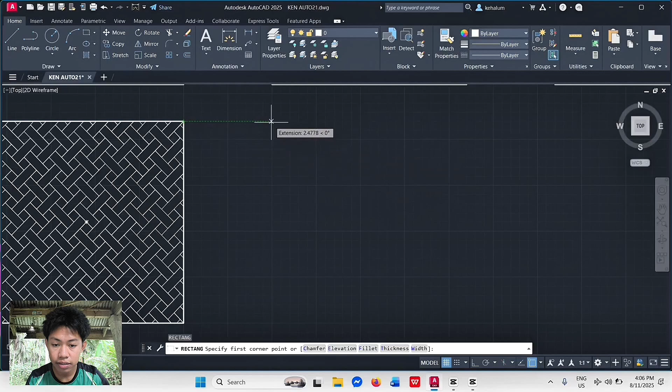Ngayon gagawin natin yung box number 5 and number 6. First, gagawa tayo ng rectangle. To create rectangle, we need to type the command REC, enter, and then specify corner point. So corner point niya is dito, pantay lang siya sa dito and then dito. On lang natin yung snap, from here to here. Ang size ng box natin is 5.5 by negative 5.5, then enter. Yan yung sukat ng ating box.

So copy lang natin to. Click lang natin, then type CO for copy, then enter. Then from here, copy lang natin dito. Yun, nakopy na natin siya.

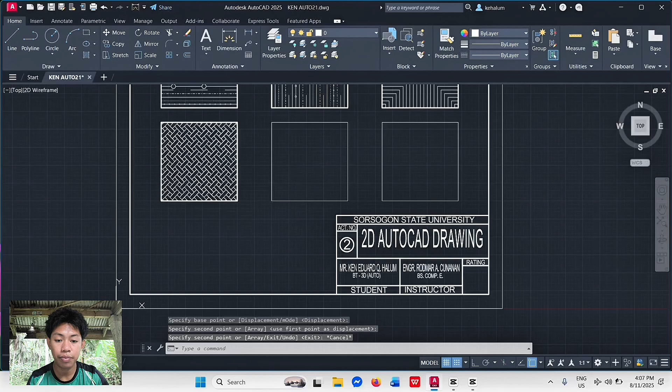Ngayon gagawin na natin yung box number 5. First, hanapin muna natin yung center. Para mahanap yung center, type lang natin yung L, then enter. Then from one corner papunta dito sa center, which is ito, then escape lang natin.

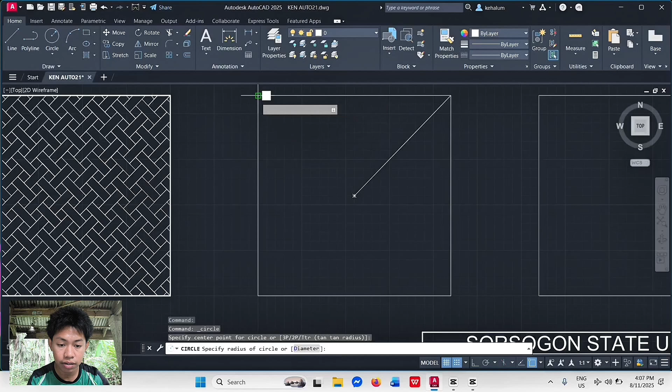Next is create tayo ng circle. Click lang natin yung circle, and then from here to here, and circle ulit from here to here. Gawa lang tayo ng 4 circle.

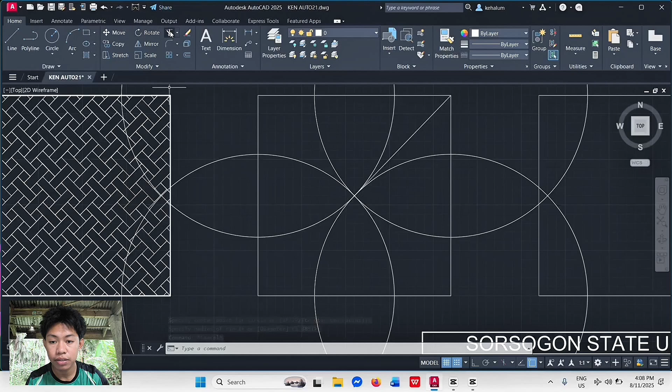Next na gagawin natin is remove the excess line. To remove that, we need to trim it. Click trim, then cutting edge, click natin yung borders, then enter. Then trim na lang natin to. Once na trim natin siya, remove na natin yung excess line na hindi naman natin kailangan. Escape muna natin ulit, then trim. Click lang natin itong trim, and remove lang natin to. Ito, tsaka ito. Yan lang yung kailangan natin.

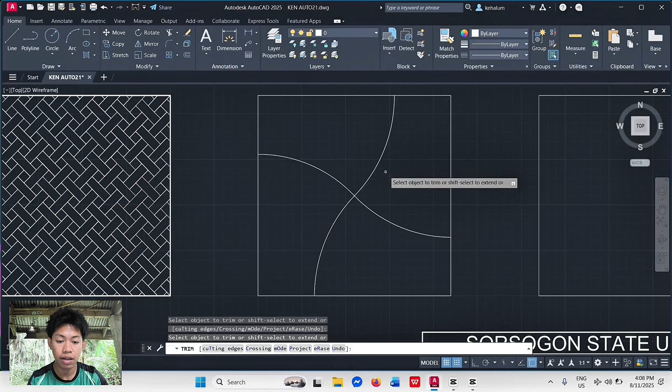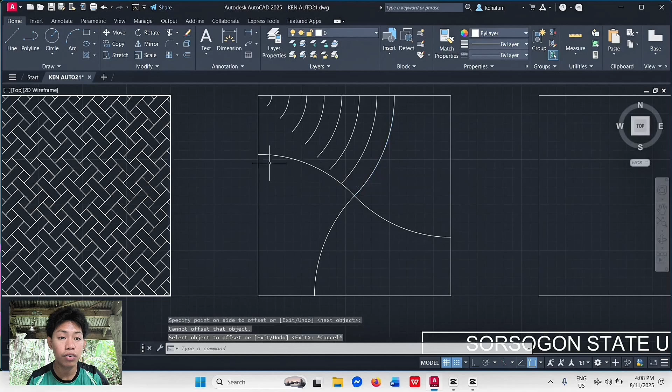Then press escape. Now kailangan natin itong i-fill ng lines. Type tayo ng OFF, then enter. Yung stop natin is 0.5, then enter. Click lang natin to, then type tayo ng M for multiple, then enter. Click lang tayo, i-repeat lang natin to sa lahat ng object natin. I'll be back once na tapos na yun.

As we can see here, tapos na natin yung box natin, yung mga object natin. Ngayon kulang siya, kailangan natin siyang i-extend. To extend it, just click this arrow and then extend. Extend lang natin siya, undo lang pag mali. Kailangan natin itong extend lahat. Click lang natin. Yan.

I'll be back once na tapos na to. So you can see here, tapos na siya.

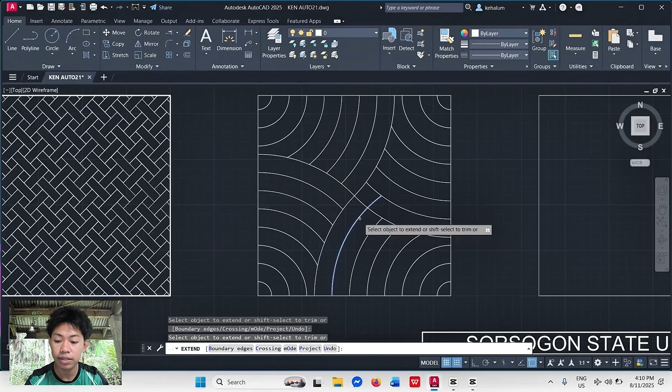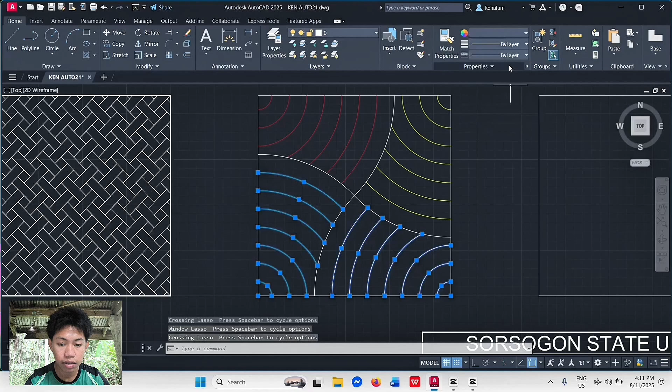So kailangan naman natin gawin is lagyan siya ng kulay. Yung first na kulay niya is red. Highlight lang natin to, dito sa color, click lang natin, then color red. Dito din highlight natin, yung kulay which is yellow, repeat natin lang sa lahat ng object natin. Color, and then blue, green. Dito din highlight, edit lang natin color blue.

Once na tapos na yan, hindi naman natin i-change yung by layer niya. Yung by layer niya is 30 mm. So tapos na tayo sa box number 5.

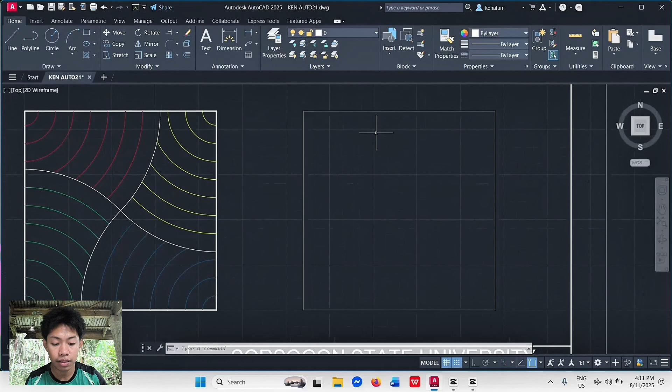Proceed naman tayo sa box number 6. Yung gagawin natin sa box number 6 is polygons. Para magawa yung polygons, hanapin muna natin yung center, at para mahanap yan, type tayo ng L, then enter. Then corner from here papunta dito sa center.

Yan yung center natin. Escape na tayo. Then gawa tayo ng circle. Yung circle natin, kailangan dapat naka-center diameter. Click na natin yan, at hanapin natin yung center, which is ito. Click natin, yung diameter niya is 1, then enter. Meron tayong circle na may diameter na 1.

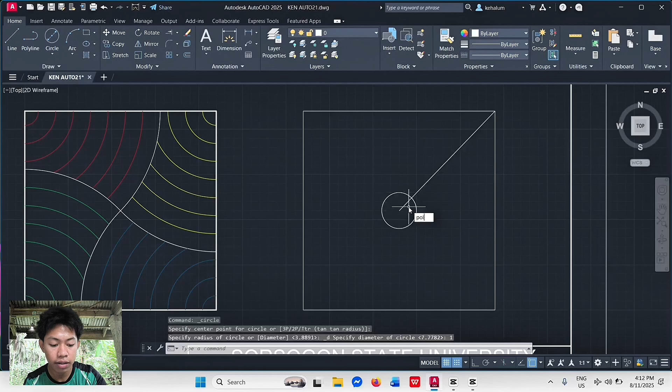Next is gagawa tayo ng polygons. Type lang tayo ng POL, then enter. Yung side niya is 6, then enter. Click lang natin dito sa pinaka-center. Then inscribe para sa loob siya ng itong circle. Yung specify distance radius o specify radius of circle ay nandito sa baba ng circle. May diamond naman na makikita, click lang natin yan.

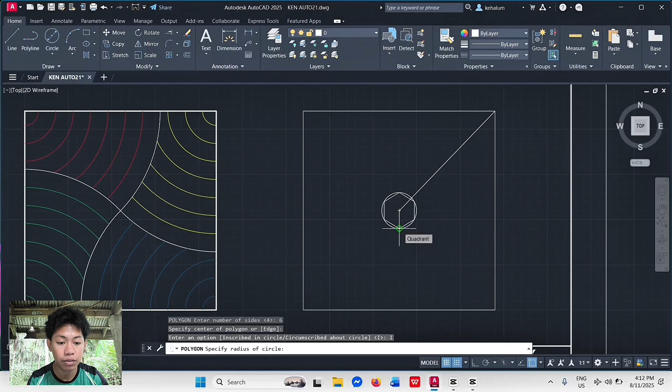Delete lang natin tong excess na object na hindi na natin ginawa.

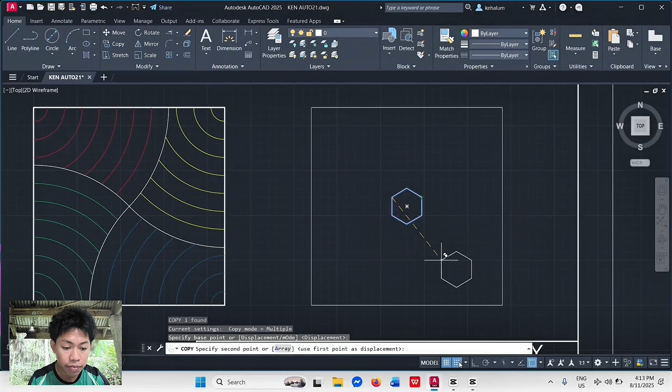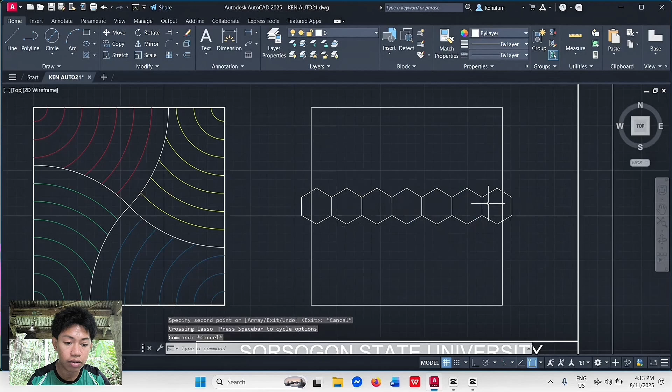Next, i-fill naman natin tong box na to with this polygon. Click na natin yung polygon, then copy, then enter, hawakan natin dito, remove lang natin yung snap, click lang natin dito hanggang ma-fill natin siya. Click lang natin, then copy, dito naman sa kabila, copy lang natin. Okay na, kailangan natin itong i-fill sa lahat ng object dito. Para mas mabilis is ganito lang. Highlight lang natin to, once na ma-highlight yan, CO lang tayo, then enter. Hawakan natin dito sa pinakagitna, i-copy lang natin sa lahat.

Then sa kabila naman, highlight natin, CO, enter, tapos dito naman sa baba.

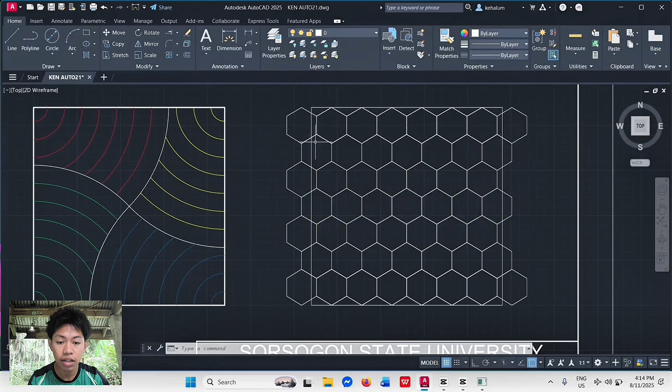So as we can see here, tapos na siya. Pero ang dami niyang excess lines or excess objects, kailangan lang natin siyang i-trim. To trim it, just trim, then cutting edge, click natin tong, then enter, then remove natin tong excess na mga object natin.

Konti lang naman, once natapos siya, kailangan na natin siyang palitan ng kulay. Highlight lang natin to, change natin sa colors, yellow. Next naman is i-change natin tong borders with different colors, which is green. Change natin din yung by layer niya, which is 30. Yan, escape lang natin.